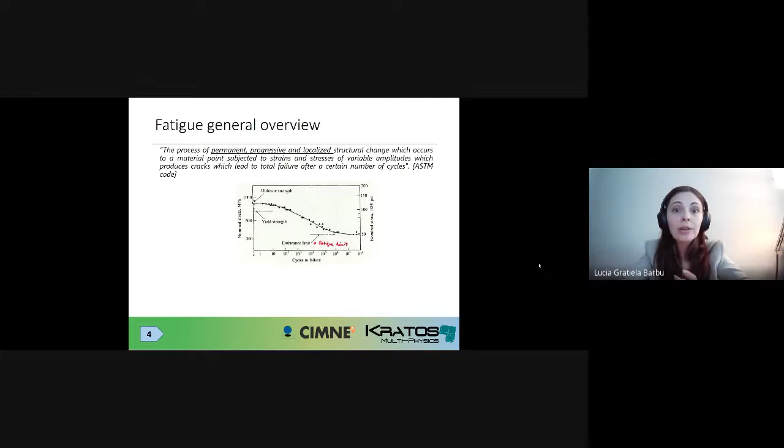And this is a good way of showing you that the different types of fatigue that can be found are actually represented on this SN curve. For instance, in this right part of the curve, we can see the behavior of high cycle fatigue. High cycle fatigue is characterized by quite large fatigue lives in the order of millions of cycles, hundreds of thousands of cycles. Primarily, we have elastic deformation inside the material, and the stress levels are quite low, below the yield threshold. Okay? The fracture associated with high cycle fatigue is brittle, and I want to say that this is what was initially understood as fatigue.

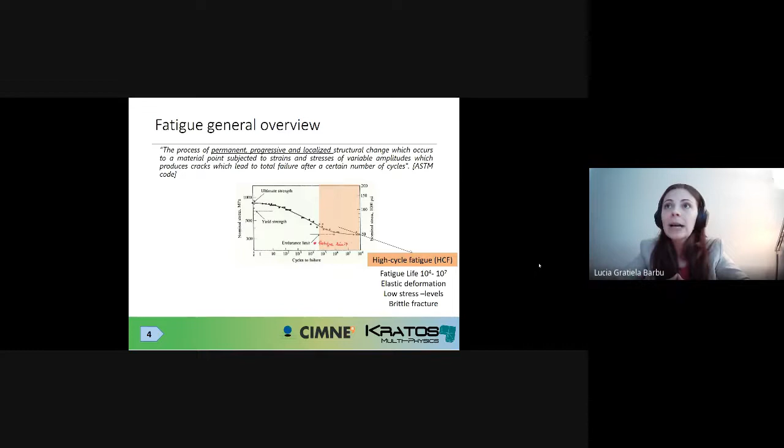In the 1960s, when fatigue became an issue worldwide, this is what was conventionally associated to fatigue, this concept of high cycle fatigue. Okay? Now, later on, there was also another type of fatigue understood in literature, which is ultra-low cycle fatigue, which is the other end of the spectrum. Here we have quite low fatigue lives in the order of dozens of cycles, maybe hundreds of cycles. We are dealing with a behavior which is completely different from high cycle fatigue. We have advanced plastic deformation, and the stress level is considerably greater than the yield limit, and the fracture in this case is very ductile.

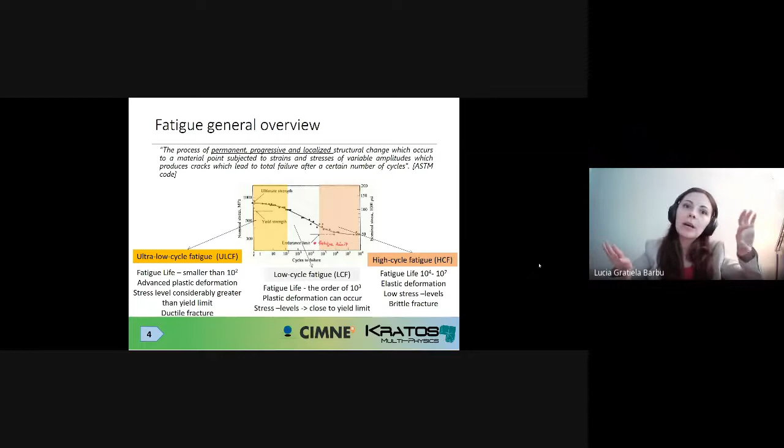Now, in the middle, we have this white area, which I will call low cycle fatigue. The lives are in between the two poles that I mentioned. So let's say about thousands of cycles, tens of thousands of cycles, hundreds of thousands of cycles. We can have plastic deformation, of course, at several different levels. And the stress levels are close to the yield limit when we are closer to the high cycle domain, and they progressively increase as we get closer to the ultra-low cycle fatigue domain.

Okay, now let's see a little bit what's the characteristic state of the art. Let's see what the industry does, what the researchers do in each of these types of fatigue. Now, regarding the ultra-low cycle fatigue, I would say this is somehow the newest fatigue area studied in literature. And here is the area where mostly we have research-based work. So we have a lot of models developed ever since 1995, 2003, 2004. In our group, Professor Xavier Martinez has also proposed a model specifically developed for ultra-low cycle fatigue, whose particularities I will explain later on. And this is, I would say, the area which is furthest away from the industry at this moment.

Now, low cycle fatigue is somewhat more standard or more taken into account by the industry, because we have some standard rules which are implemented in different fatigue softwares. For instance, the Coffin-Manson rule, which is, I believe, the most widely used, the Basquin rule, the Morrow rules. Here is an area where normally you find damage and plasticity models, sometimes joined together. And most of the models developed in this area are based on two base models, I would say, which are the Chaboche model and Lemaitre-Chaboche, developed in 1988 and in 1990. Now, there are a lot of researchers working in this area, but a lot of the models proposed nowadays are generally extensions based on these two models.

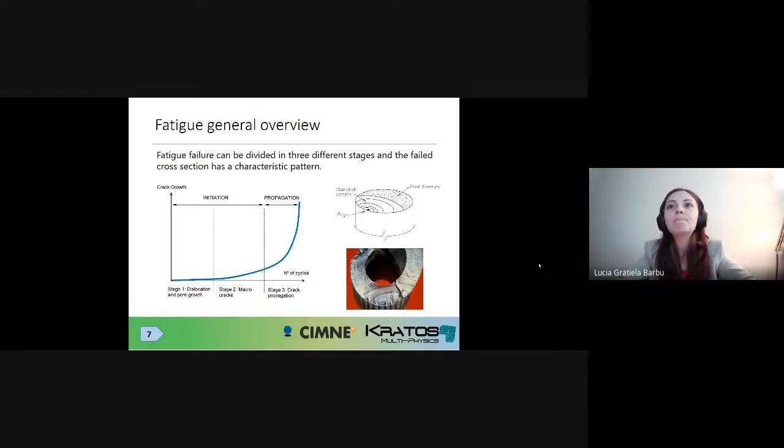Now, another concept that is important to establish at the beginning. When we are dealing with cyclic loads, I don't want you to think that we always have regular cyclic loading, because this is not the case. This is the simplest case possible. But a lot of the mechanical components that industry uses these days are dealing either with sequences of regular cyclic loads or combinations of different cyclic loads.

And here, for instance, you need a rule which helps you sum the effects, the damage effects, of each one of these blocks. The most widely used is the Miner rule with linear damage accumulation. But also you can be dealing with irregular cyclic loading. And in these cases, you have to use a cycle counting technique, such as rainflow, I would say is the most famous one. And after you divide this irregular cyclic load into cycles with similar characteristics, you group them and you apply them in a specific order, then you can apply the Miner rule.

But this continuum damage model by itself is not sensitive to fatigue. You can apply millions of cycles. You will have no change in the material properties. And if you have elastic deformation, you will be permanently in elastic behavior. But we know this is not what happens in fatigue. So we need to change the model somehow.

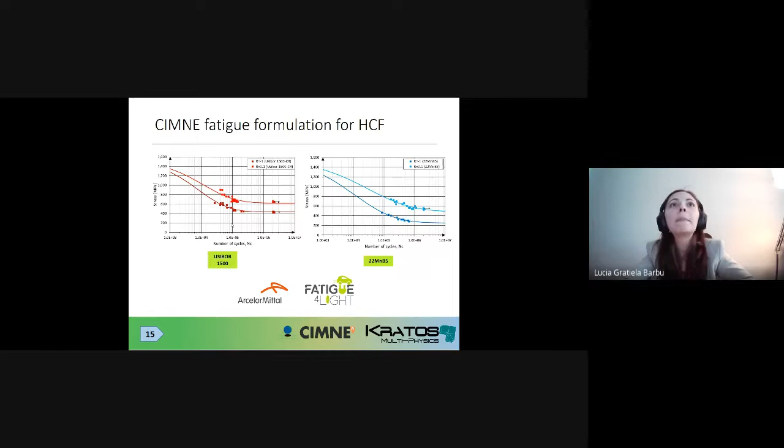And just to finish this part, I want to stress that we are not working with discrete, isolated SN curves. When we are calibrating these materials and we are calibrating specific curves for specific reversion factors to experimental points, what we are actually doing is we are configuring this whole surface of the SN curve. So, for instance, if in a finite element simulation you start to have damage due to fatigue,

what will happen is that you will have right away a stress redistribution outside of the area where you have damage. This means that the stress state will be altered at those specific integration points inside those specific finite elements. This means that even if you begin with a stress ratio, for instance, of -1 or 0.1, you will have points that throughout the nonlinear process will change, will go away from that SN curve, which is specific

for -1. If you have a model which only takes into account discrete SN curves, you are going to be in an indetermination if you are going away from that specific SN curve. This is why it's important to have a continuous, well-defined surface of stress number of cycles curve. And this is what we are doing inside our formulation. Here you can also see what the reduction surface looks like when you intersect it with the SN surface for a specific level of maximum stress of 700 megapascals.

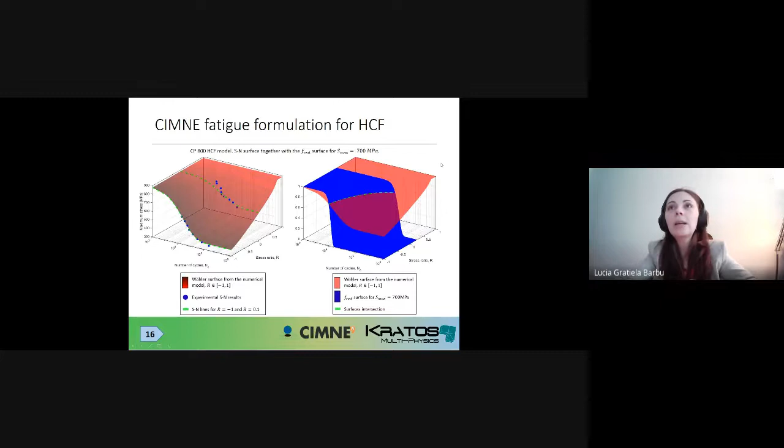Now, an important thing for us, and this I didn't mention in the state of the art. Just let me say that when you are using the Miner rule, the linear damage accumulation rule, although it is very widely used because it's very easy to use and it's a useful tool for the industry, the Miner rule is not always correct. It has been invalidated for several different types of materials. Why? Because the Miner rule assumes that each cycle of loading has exactly the same degradation level, even if it's the first cycle of loading, even if it's the 100,000th cycle of loading. And this is not correct.

It was demonstrated that the sequence in which different cyclic loadings are applied matters, so if you're in cycle 1, or if you are in cycle 2000, or if you're in cycle 200,000, the degradation level is not the same. It can be different. So it's important to have models that are able to account for the load sequence effect and for the damage accumulation effect.

And in this sense, we have been working together with our colleagues at Eurecat, which is the Catalan Research Center, on designing an experimental campaign that can help us demonstrate that our model is perfectly capable of accounting for this load sequence effect. Now, when you start to do this type of analysis, an important thing that you have to make sure is that you are quantifying correctly the change in the material properties for each different block or each

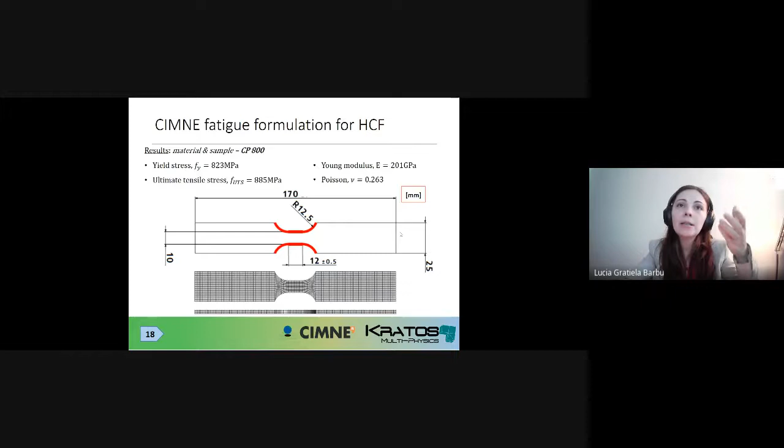In order to do this, as I say, we've been working with Eurecat, and we've done a study on the complex phase 800 steel. This is the shape of the specimen which they tested, and this is the finite element model that we've used in our numerical simulation.

And what we wanted to see is if you apply a determined number of cycles, which we decided together is going to be 31,000 cycles, and then you break the sample monotonically, we were interested in finding out if the maximum level of stress attained by that specific specimen after having applied 31,000 cycles was the same as in the beginning, the same as for the virgin material or not.

What they saw experimentally was that there was a reduction in the maximum stress achieved inside the specimen of about 2.8%. Basically, the maximum level of stress went down from 885 megapascals to about 865, let's say, as an average.

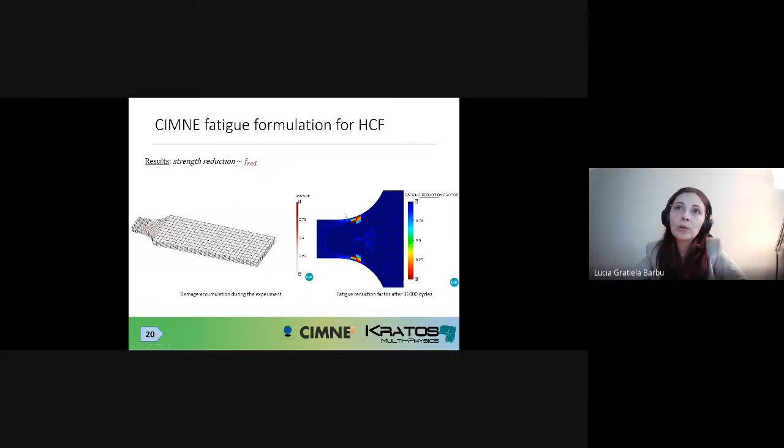Okay, so we started to do the same numerical simulation, where we applied the number of cycles, and then we broke the sample monotonically, and we took a look at what was the reduction factor after 31,000 cycles, and you can see here the areas which have reduced strength due to having applied these 31,000 cycles. Okay, and then we looked at the level of maximum stress that we obtained in the numerical simulation following this exact same load history. We found that we had a really good agreement in this sense.

So now we are working on designing the load sequence campaign experimentally. They are doing experiments, and when we receive the results, we have to also reproduce them.

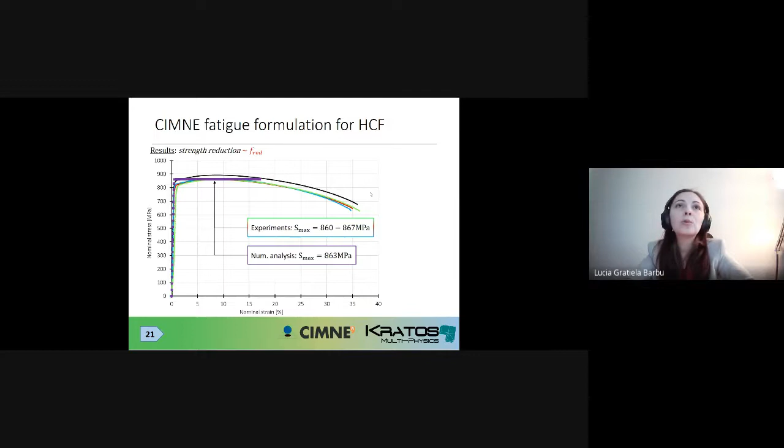Okay, now something else that's very interesting for the high cycle fatigue domain. High cycle fatigue has quite a big problem regarding the experimental time needed to have a full characterization of a material. You need to do a lot of experimental tests. Basically, for each SN curve, you need about 19 specimens if you want to be scrupulous and also have statistical effects accounted for. And this takes a long time.

Specifically, for high cycle fatigue with lives of millions of cycles, you need about 2 weeks to a month of having a testing machine doing these tests. It's completely blocked for that material and that specific geometry.

So in the Fatigue for Light project that we have in our group, we've worked together with Eurecat and with ArcelorMittal to design a testing strategy which significantly lowers the experimental time needed for fatigue experimental characterization. And they have developed at Eurecat a rapid fatigue test, which is based on stiffness evolution. What does this consist of?

Well, they apply blocks of cyclic loading of 6,000 cycles specifically, either at a ratio of 0.1 or at a ratio of -1, with a specific loading frequency depending on the material. And after each of these loading blocks, they do a loading and unloading of that specific specimen at 15% of the ultimate tensile strength. This is done to detect the change in stiffness inside the material.

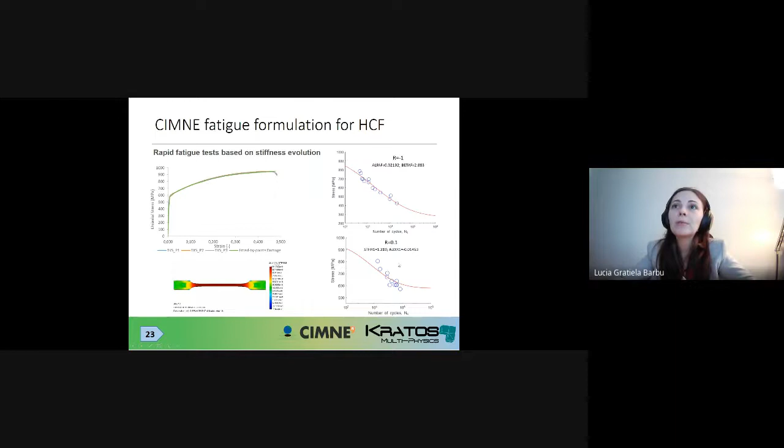And then we proceeded to evaluate if we obtain the same behavior after doing this rapid loading history with the blocks of cyclic load. In the experimental analysis, they were able to detect an increasing level of structural damage. What I mean is they computed a specific damage parameter based on the evolution of the stiffness. This is somehow to be understood as a macro structural damage.

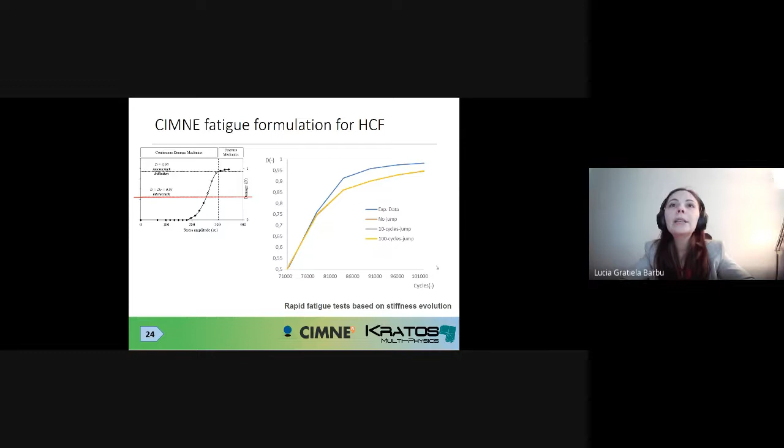Okay, it's not similar to the integration point damage that you would see in a constitutive law. And we wanted to see if at structural level of the sample we were able to obtain the same behavior. And what we've seen is that we've gotten quite a good agreement between the numerical and the experimental part.

I have to say that here we only analyze the damage or the change in stiffness after a specific level of damage, which is 0.5. Actually, here there is a typo, because this is what they were able to detect with the open eye, let's say, experimentally, I mean. And you can see here the adjustment between the numerical and the experimental curve.

And we've also had the opportunity here to test a cycle jump algorithm, which we developed quite some years ago, that helped us significantly reduce the computational time of high cycle fatigue simulation. Why? Because when you do this simulation applying the load for 100,000 cycles, cycle by cycle, you are going to spend a lot of time, basically about 24 hours.

And we wanted to see what happens when we use cycle jump strategies. How are we able to reduce the computational time? And you can see here, for instance, with a cycle jump or jump step of 100 cycles, we are managing to lower the computational time to 10 hours. And this analysis can be further pushed down in terms of computational time.

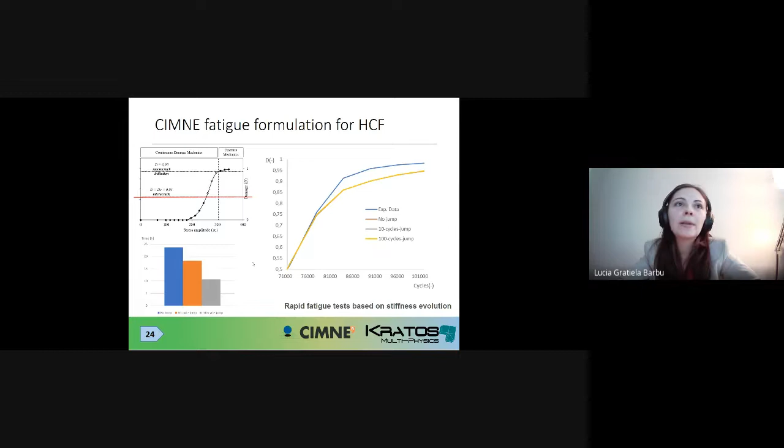Now, another important value that they could determine from the experiments was the fatigue limit for this specific TWIP material. What they saw experimentally was that the fatigue limit was 260 megapascals. And what we saw in the numerical simulation, measured at structural level, was 258 megapascals, which is, again, a fairly good agreement.

If you are interested in knowing more details about this specific experimental technique, which reduces the testing time from a minimum of 2 weeks to only 15 hours, you can take a look at the paper which was published by our colleagues at Eurecat.

And if you're more interested in our numerical model and how it adjusts to this experimental behavior, you can follow Luis Antonio Gonçalves, our PhD candidate working on this topic specifically. He will present his work in the Congress on Numerical Methods in Engineering in Gran Canaria in September. Okay, now let's go to ultra-low cycle fatigue.

Okay, I'm running out of time. I have so many things to talk to you about, so I'm going to go very fast.

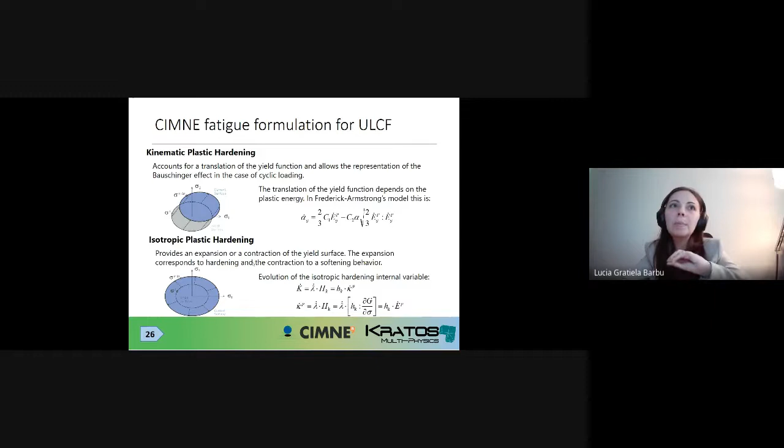This is a model which was proposed in 2015, and I don't want to get into details because we formulated it then and haven't used it in the past years, since we didn't have research projects specifically focused on this. Just take into account that it uses kinematic plastic hardening coupled with isotropic plastic hardening. We have a specific constitutive law developed for that, and you can find the expressions, which are based on the plastic energy, in these papers. This work was developed during my PhD with the supervision of Professor Xavier Martinez, Sergio Oller, and Alex Barbat.

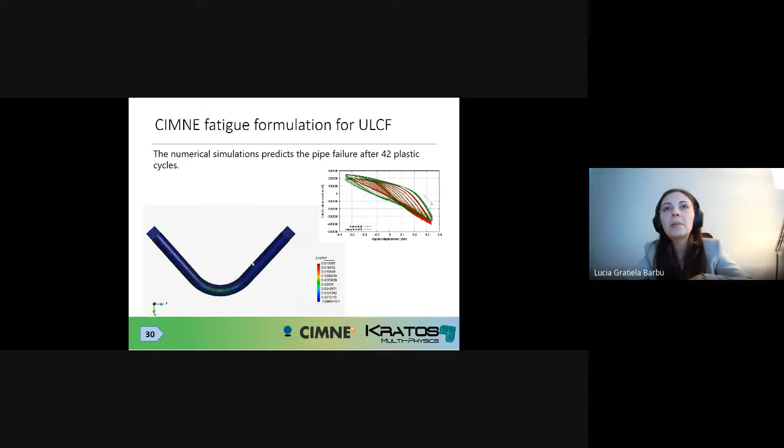Okay, now results. We used it for a project in oil and gas for the piping industry. Here you can see, for instance, an elbow subjected to cyclic loading with some internal pressure, and the adjustment between the numerical and the experimental behavior, which was quite good. However, regarding the failure mode, there was a slight difference because of the level of internal pressure.

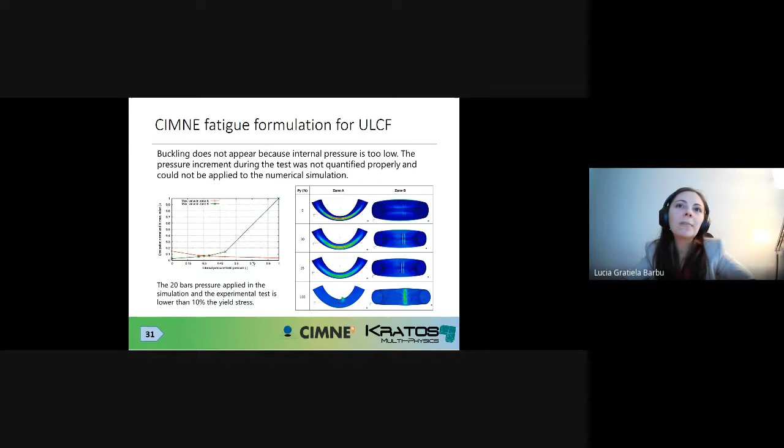And this motivated us to do a whole analysis of how the failure mode changed with the level of internal pressure. You can see more results in the publications that I mentioned. I don't want to insist more here because I have a lot of news on other things.

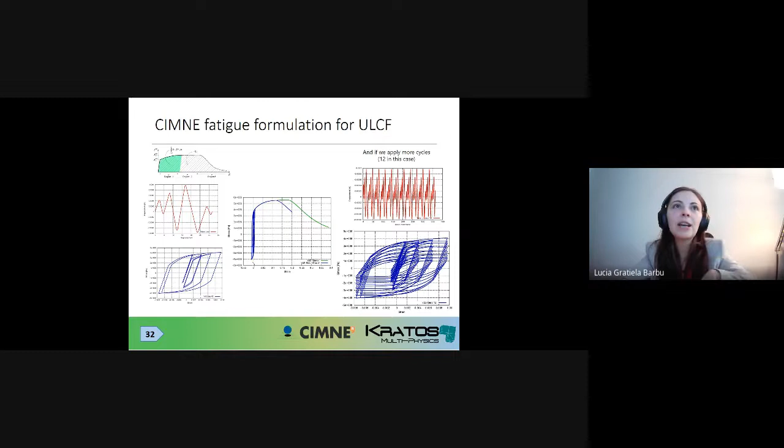Now, just bear in mind that this ultra-low cycle fatigue formulation, this specific constitutive law, is perfectly capable of capturing a random cyclic loading and the effect it has once you repeat it for a specific number of cycles, even with these very crazy hysteresis loops.

Now, low cycle fatigue, this gray area between the plasticity and the damage domains. There is a big question you have to answer when speaking about this area: if you're using a plastic damage model, which you should be using for low cycle fatigue, how much energy should you devote to plasticity and how much to damage?

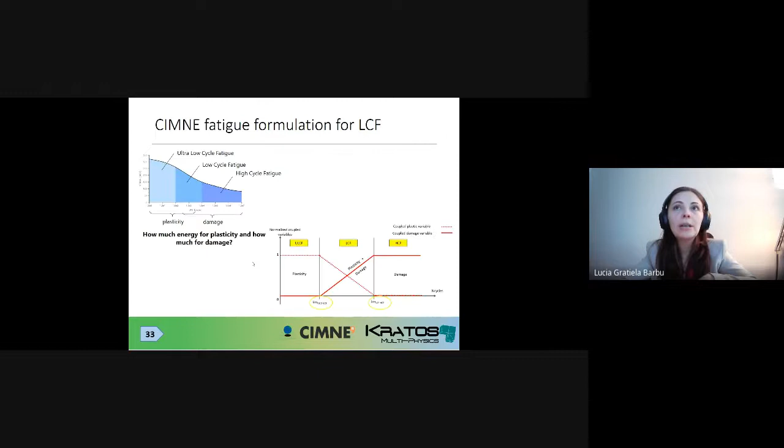Now, during my PhD thesis, I proposed something over here, but this was still quite a green approach. It could still be quite developed. And we've worked a lot in this past year and a half to develop strong coupling between plasticity and damage throughout the plastic damage model. What do I mean with strong coupling?

Why is it needed? You see, when you have a plastic damage model which is exhibiting weak coupling, what you have is a basic plasticity model and you compute the damage variable based on the level of plastic strain that you have in your model. And this is very good. It's very useful for a specific range of application.

But what happens when you are interested in migrating, for instance, from low cycle fatigue to high cycle fatigue? You had some plasticity at the beginning, but then you are going towards a load history which only needs to give damage behavior inside your model. Well, if you're using a weakly coupled model, you won't be able to do this because if you stop plasticity, automatically this stops damage.

So this is why we needed strong coupling, why we needed to integrate damage and plasticity at the same time, and we needed models which would be easily reduced to each one of the base phenomena, either reduced to plasticity or reduced to damage if needed. In this sense, we've been working a lot on 3 different models.

The initial one was proposed by Bibiana Luccioni in 1996. We didn't test it in 1996 because we were very young at that specific point. But we've started to implement this and we've tested this model and we've seen some limitations. And this is why we decided to follow some other avenues.

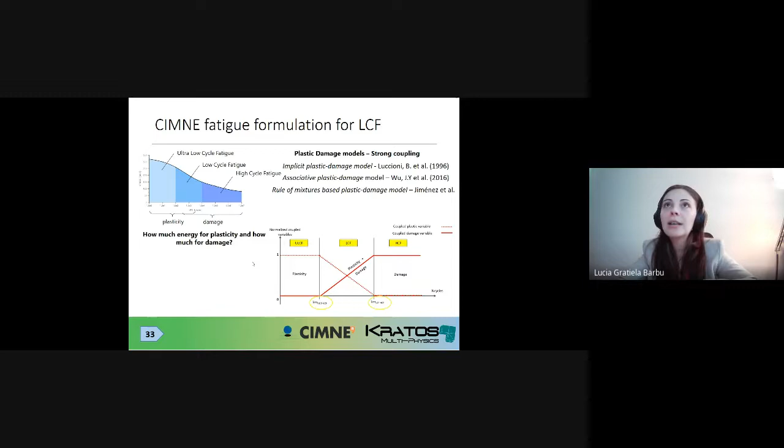For instance, we investigated the associative plastic damage model proposed by Wu and Professor Cervera in 2016. And we've also proposed and formulated a brand new plastic damage model, a very nice and interesting idea, which is a rule of mixture based plastic damage model proposed by Sergio Jimenez.

Okay, now, if you are looking at these 3 different plastic damage models, I've arranged them a bit differently and you will understand very soon why. Basically, because I want to show you there is a transition between a less coupled behavior and a more coupled behavior. What do I mean with less coupled behavior? For instance, the rule of mixture based plastic damage model can allow 2 different surfaces, one for plasticity and one for damage, which behave in a completely different way.

The implicit plastic damage model by Bibiana allows 2 different surfaces, but if they are moving in 2 different ways, you're losing convergence, you have instability in this model. This is a big limitation for this model. Now, the associative plastic damage model proposed by Wu and Cervera only has one yield surface, which is common for both plasticity and damage together.

Now, let's look at some simple evolution curves between the three different models. For instance, for the rule of mixture-based damage model, the internal variables of the model are damage and normalized plastic dissipation, which is this kappa p variable. Normalized plastic dissipation means the accumulated plastic dissipation until that specific load increment, divided by the total level of fracture energy.

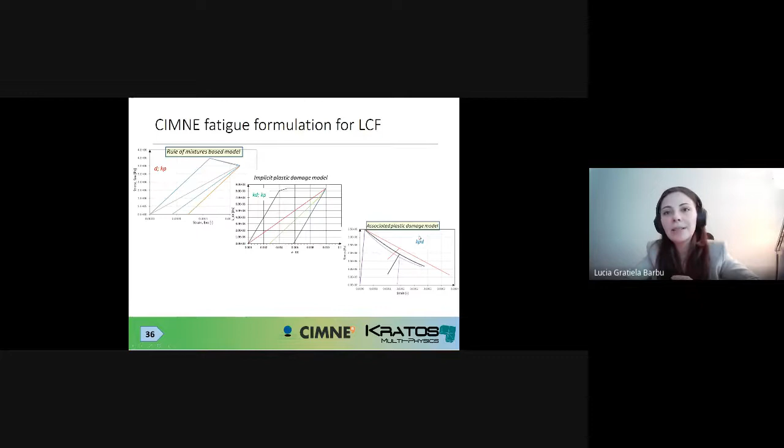So when you have a level of normalized plastic dissipation of 0.2, you dissipated 20% of the fracture energy available for the material. When you are at a level of 1 for kappa p, you dissipated completely all the energy available. The implicit plastic damage model of Bibiana had a normalized damage dissipation and a normalized plastic dissipation as internal variables. And for the associative plastic damage model, we have a sole unique dissipation, which quantifies both damage and plasticity dissipation together.

If you want to know more about this, Sergio Jimenez and Alejandro Cornejo have been working intensively on this. Please pay attention to Sergio's PhD defense, because he will have so many interesting cases to show and more time to speak about this. Also, follow his talk in Oslo, Norway, where he will explain the rule of mixtures plastic damage model, and Alejandro's talk in Oslo, about the associative plastic damage model.

And you can have more information about the specific equations behind each one of these models in a paper that we hope to publish very shortly in the Computer Methods in Applied Mechanics and Engineering journal. Okay, I'm going to go very fast.

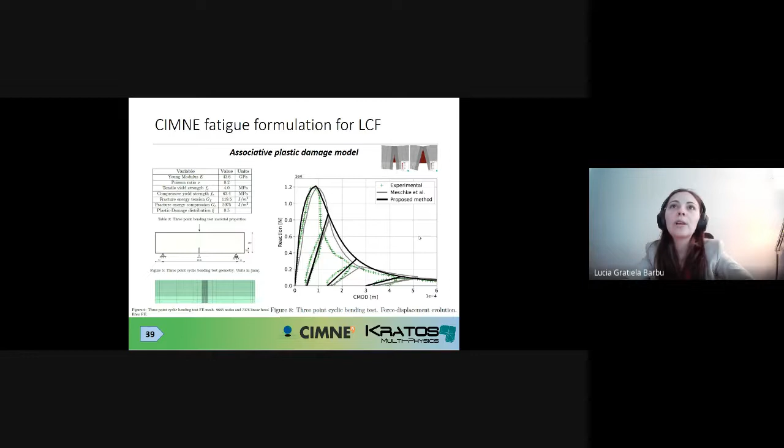We've applied this model, for instance, for a 3-point bending case, and we studied the crack mouth opening displacement with the reaction force, and you can see here the adjustment that we obtained. It was interesting, it was a good behavior.

Then we go to the rule of mixture-based plastic damage model. I have to say this is a model that I'm deeply in love with, because the rule of mixture is something that has been used in the composite world since the 1960s. It's a very old idea, but it has never been used for describing the behavior of a homogeneous material.

Because what we are doing here is we are assuming that in a specific volume of a homogeneous material, we have a volumetric part which will behave according to plasticity laws, and we have the remaining, the complementary volume part, which will behave according to damage. And this is very, very interesting and very clever, because it allows you to play with these participations and understand the behavior of homogeneous materials, not as a combination of materials, which was done for composites where you had fiber and matrix, but as a combination of constitutive laws, of constitutive behaviors.

And the interesting thing here, as I said, complementary and volumetric participation for the damage and plasticity, is that this volumetric participation is not fixed. It's evolutive throughout the nonlinear process. So if you have a material which starts to exhibit plasticity at the beginning of the nonlinear processes, but later on migrates into a damage behavior, or a combination of these two, this model is perfectly capable of capturing this. This is a very, very important characteristic.

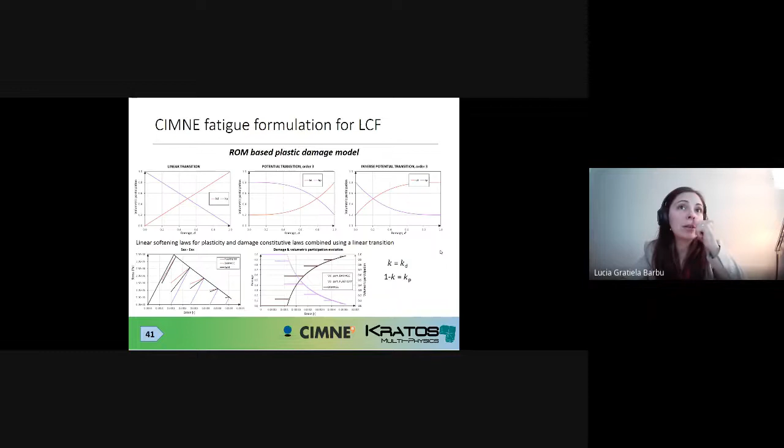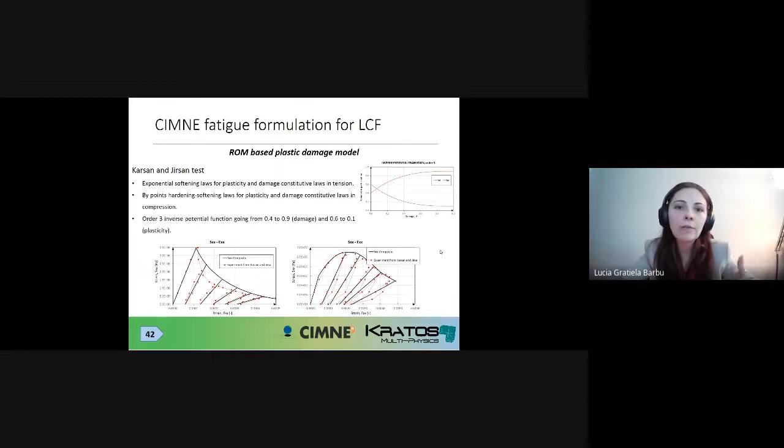Just an example for linear softening laws: when you combine damage and plasticity and you use a linear transition between damage and plasticity. I don't want to insist here. Another test that we made, which is a typical test, Karsan and Jirsan for plastic damage models. And you can see here the behavior under tensile and under compressive. Also important to know, these models admit different behavior under tensile behavior, and different curves, hardening, softening, whatever you need in the compression behavior.

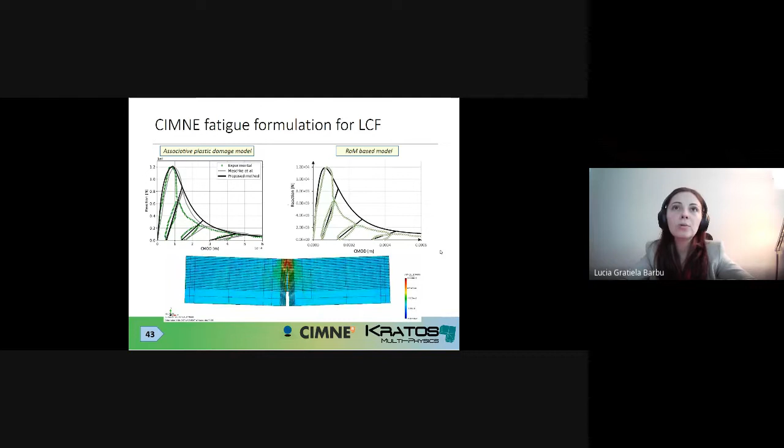Okay. Now, when we compare, for instance, the three-point bending for the associative plastic damage model with the rule of mixture-based damage model, both of them have their particularities, and one of them can adjust better to a specific case compared to the other. Let's say that you have a lot of tools that you can use when you want to simulate a specific case here. Another case that we did, which was compressive behavior, again, a comparison between the associative plastic and rule of mixtures. I don't want to insist here again.

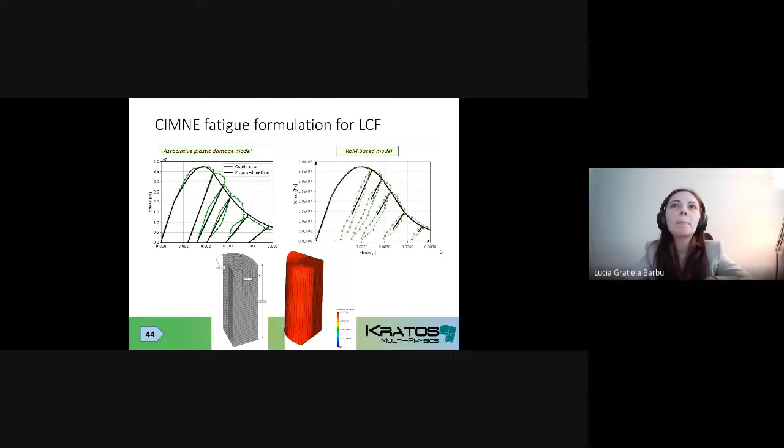But let's just say that we also need some transition cases, because as I said, it's important for us to be able to migrate from monotonic with fatigue, fatigue monotonic, or combinations of cyclic loading. This is why we need transitions from plasticity to damage, damage to plasticity, and we need specific transition functions between these models just to make sure that we don't recuperate, we don't go back on the level of plastic strain, it's fixed, and we don't go back on the level of damage once we switch from a process to the other.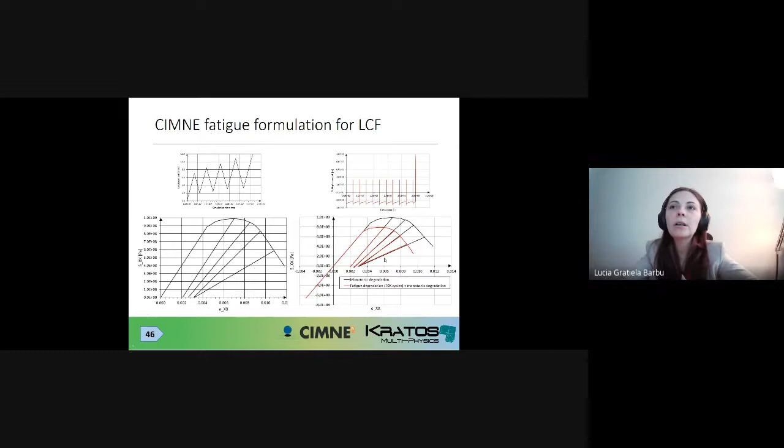Okay, future work. What about the manufacturing processes?

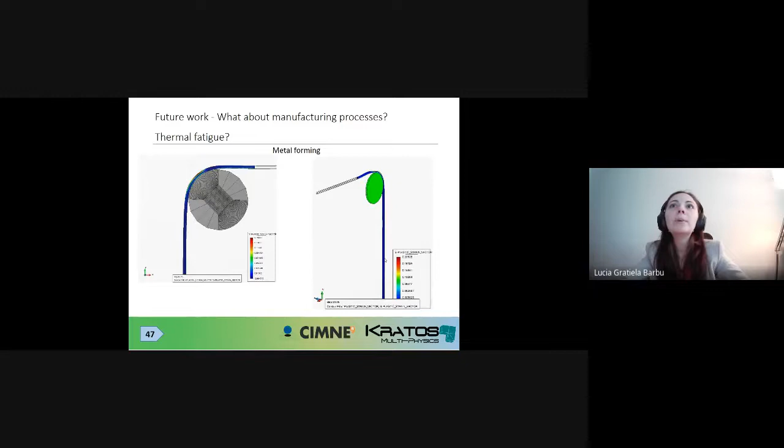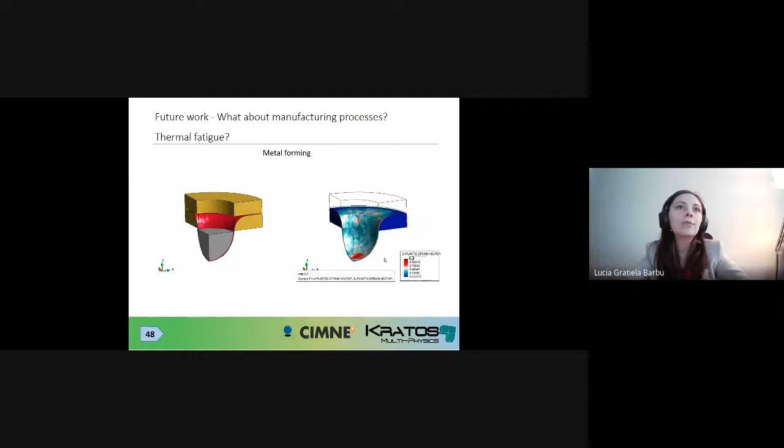Well, Alejandro Cornejo has been working a lot on this, on developing specific models inside Kratos regarding metal forming, because this is an important process that we need to take into account when addressing fatigue behavior. You can see here different cases for stamping simulation, etc.

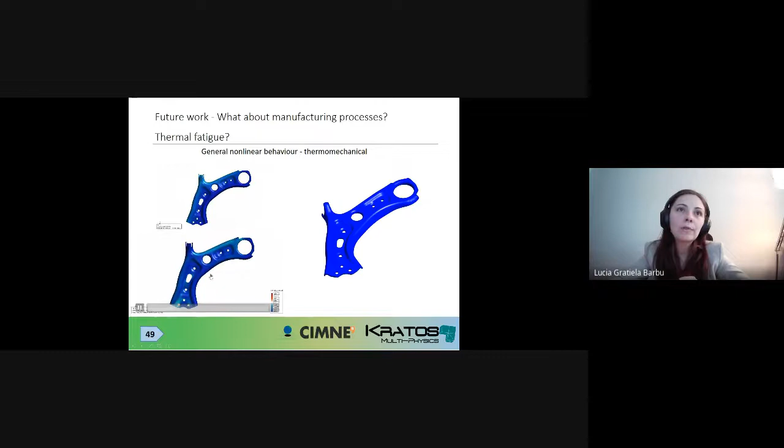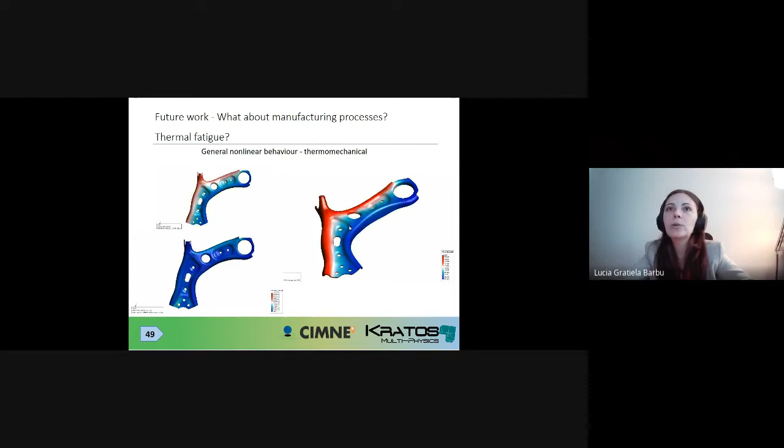Then about thermal fatigue, this is also a topic we are very interested in. This is why we coupled the mechanical solver with the thermal solver, and we've done some very preliminary simulations where you apply a heat flux, for instance, on this lower control arm on this edge, and you look at the evolution of the temperature and the evolution of the von Mises stresses as this heat flux increases. And here you can see, for instance, the deformed shape of this suspension arm, a bit exaggerated, of course, when you continue applying this load.